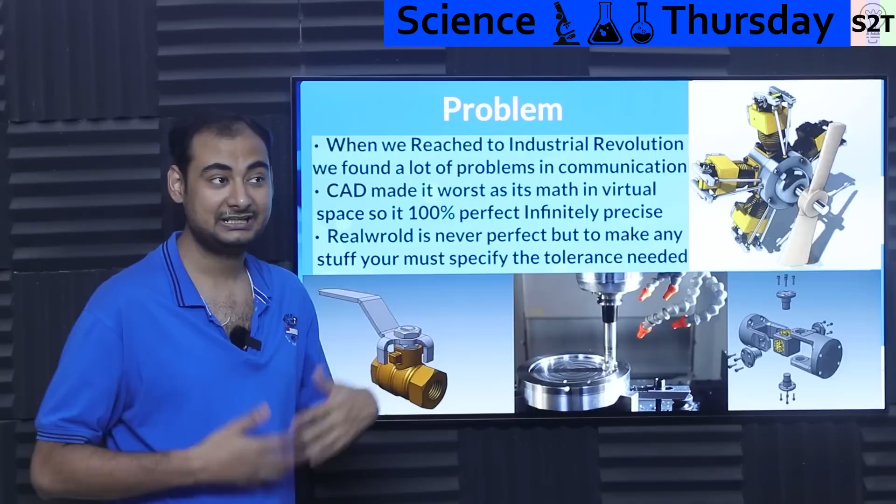So what exactly is the problem? Well, the problem did not start until we reached the industrial revolution, because before that everything was very in-house. A company used to make things, but everything was in one place - the person designing it, the person machining it, or sometimes it could be one person doing it very slowly. So there was no issue of communication.

But once we reached the industrial revolution, we started to create an ecosystem where you'd say, hey bro, I want this axle to fit for this - you're supposed to be able to tell someone else. And then we realized communication is a hell of a beast.

The problem is, what do you mean by 10 millimeters? I'm like, wait, doesn't 10 millimeters say 10 millimeters? Well, in a perfect infinite world, yeah, it will be 10 millimeter. Real world is not like that. Real world is not perfect.

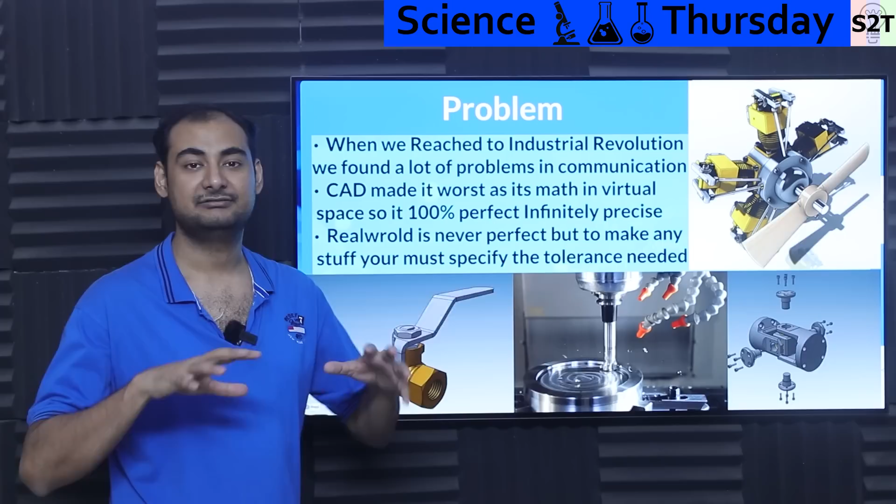And CAD made it worse. That's a recent thing - CAD is a mathematical world inside a virtual world. So once you go there, it's like, you want 10 millimeter? It is 10 millimeter. It's like, bro, 10 millimeter does not exist. If you look into the mathematics going into the virtual world that's making these things, it's perfect. Zoom in, 10 millimeter is 10.000000. There is no plus and minus. It will go to infinity, it's perfect.

Now, the real world is not perfect, meaning 10 millimeter means 10 millimeter plus or minus a certain extent. So it could be 9.91, it could be 10.01 - there would be some tolerance. Or if it's a really good part, it could be 10.001, or it could be 9.991. So there will always be a flex to it, there is always a give to it, a tolerance to it.

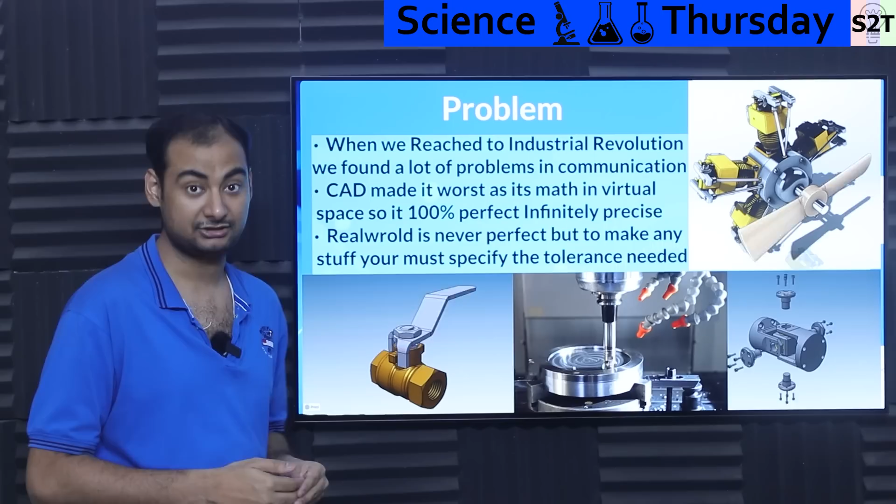And that created the communication issue. Basically, the moment we say, hey, get this part manufactured there and we're going to assemble it, get this part there to improve your production output, and then you got all the parts - none of them fit with each other because they are not communicating properly.

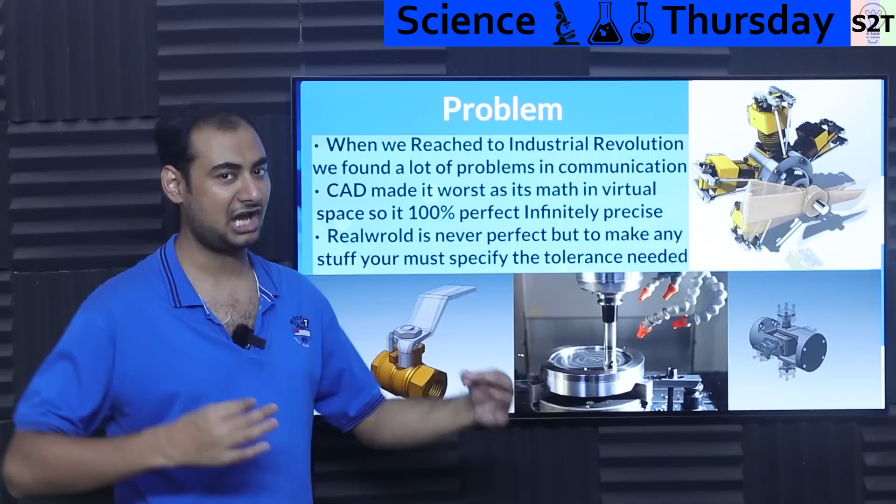Meaning the 10 millimeter of one is very precise, absolute - 10 millimeter, who cares about that 0.000, that plus and minus - that's the hassle. So that creates an issue. We do not live in a world where we have 100% perfect infinite precision. So that creates an issue.

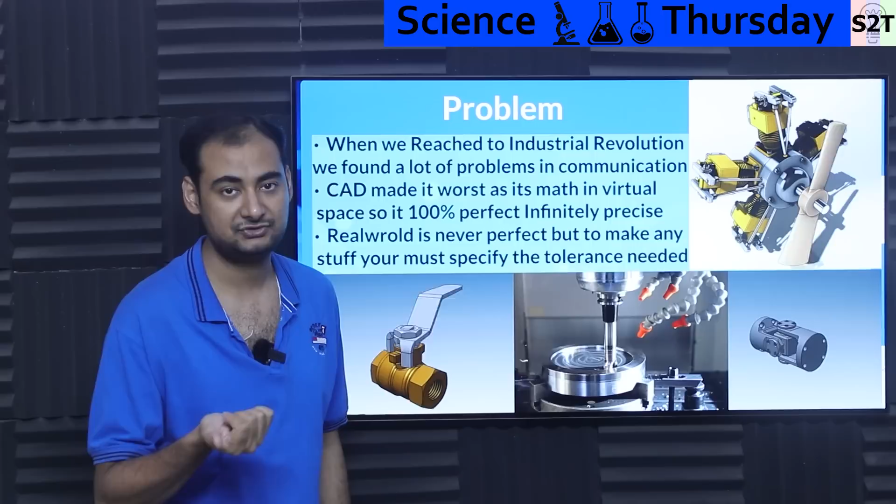And you must specify basically how the CNC machine works. It has a lot of what you'd call flex in how it works. Basically, if you want a rough and dirty part, boom boom, take and go. But if you want a really precise part, then you're going to do a lot of tool changing, you're going to optimize your tool path - all of those things have to be done. How the heck do you communicate that? So that is the problem.

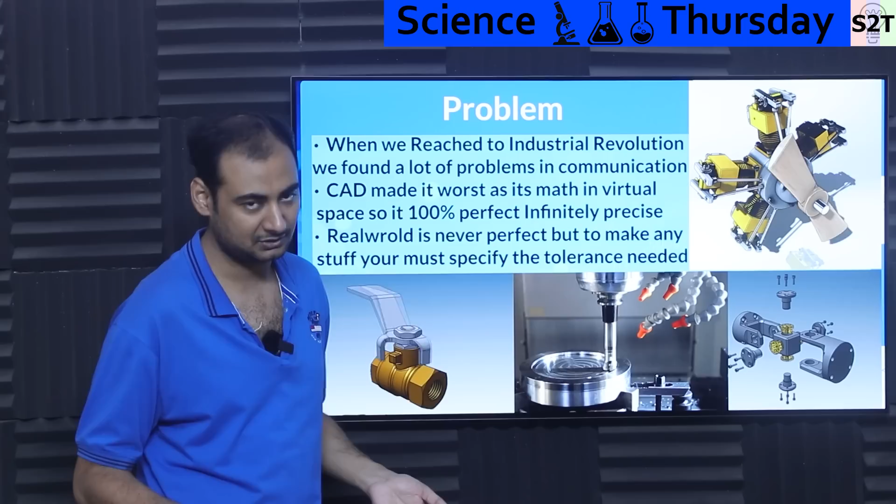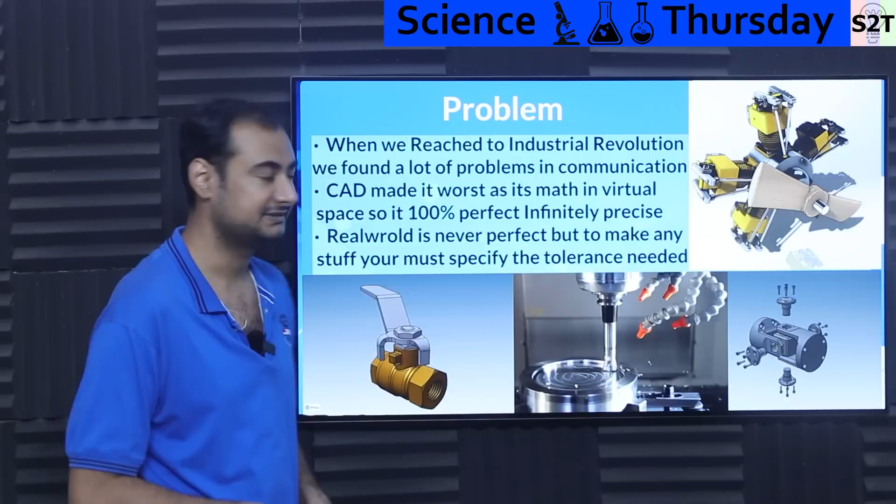The communication breaks down. The moment we want to make this, as long as everything is in-house, you do not even notice this is a problem. The moment you say, okay, let's say this country is going into tariffs, we're going to take the factories out and put it somewhere else - you would be shocked. The things that were working no longer work simply because it's not fitting together. So there is a genuine problem that we must take care of.

So the first iteration, Mach 1 iteration of this technology was tolerancing. Basically, machines can never have infinite precision. You may be like, okay, but we can make 10 millimeter - yes, 10.0, we got this. But what about 10.001? Okay, well, expensive CNC, but again, we got this. What about 0.0001?

Now you are going into EDM territory, and not to mention expensive EDM territory. Normal EDMs can't even do that - not because the technology can't do that, it's that their motion systems have to be that refined and that precise. So that creates a scenario - we cannot achieve infinite precision.

They are not very tight, so to say. So we always have to specify need and some tolerance, and you need to have it, because worst case scenario is you do make it exactly like 10, and somebody made it 10. Then either it will not fit, or worst case, it will fit and then jam, and it will be useless. So you're like, okay, I'm going to fit this perfect bearing, and it's like, it's not gonna work. So it will jam up.

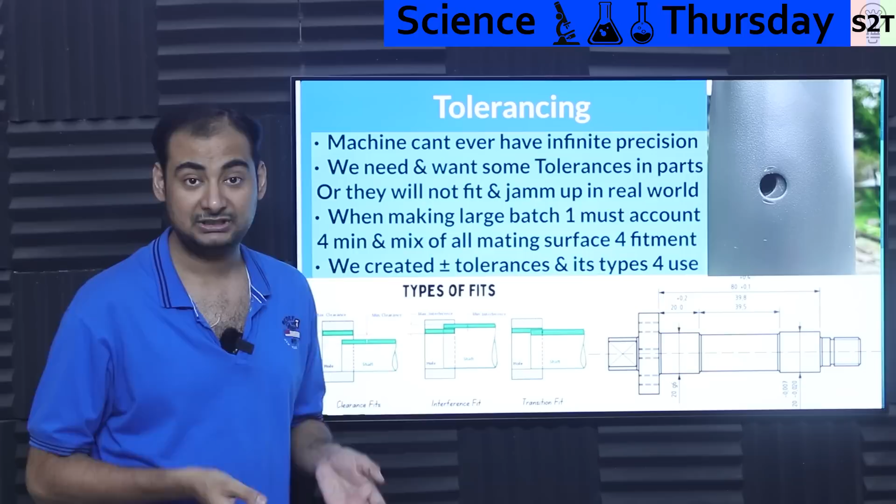So we have learned it the hard way that you must give something. And be mindful, if you are doing it properly, you will also account for temperature. For example, this aluminum part goes into the steel part. What is the thermal expansion of steel versus the expansion of aluminum? You have to figure things out. It's one of those things that you must account for.

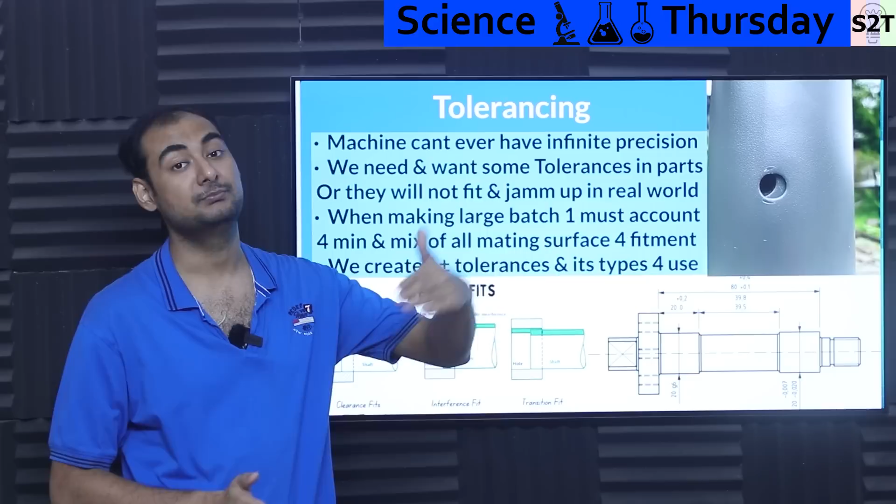When you're making a large batch, it's one thing. Let's say a designer made something, an engineer working on it manually, physically going and double checking everything. He could use his own intuition to fine tune it and make it a fitment. But the moment you go batch processing, this sort of up and down is not allowed, where it's like, no, one person methodically building it - that is no longer possible.

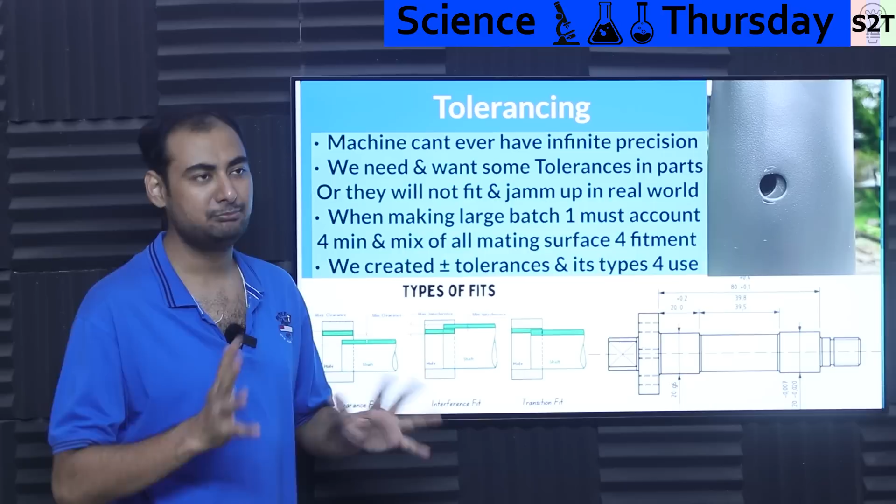So what do we do? We do min-max. Basically, what is the minimum, what is the maximum allowed, so it can work for the intended application. For example, you can have a clearance fit, you can have an interference fit, and then you can have a transition fit. You have to specify what you need. Do you need this pin to be a locating pin? Then you focus on interference fit, because once you put it, you do not want it to move. But do you want it to be like a bolt, and you are using spring tension to lock it down? Then you're going to focus on clearance fit. Or sometimes you just want it to be rotated once in a while, so it's transition fit. Again, you have to figure it out based on your application and the material property.

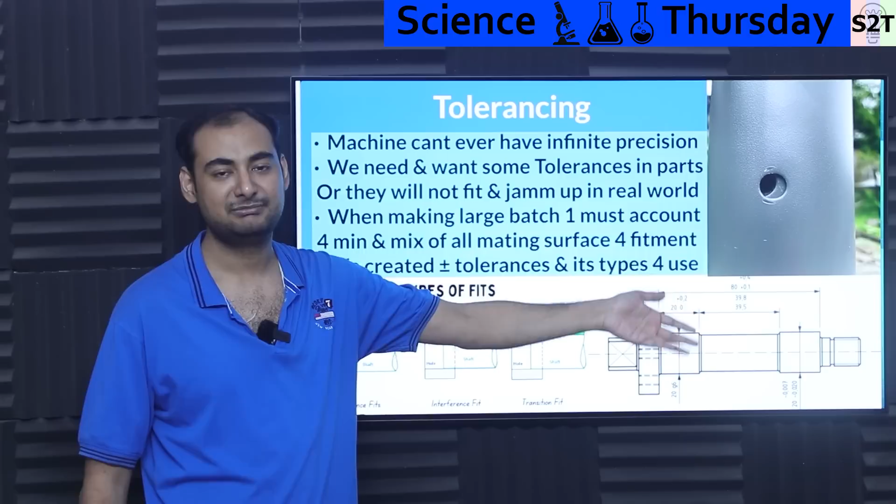This has to be taken into consideration. If you do not, this will happen - things will not fit up properly. So we define min-max, and the easiest way to spot min-max is there will be two dimensions. For example, you have one dimension that says 39.5 and another says 39.8. What the hell? That simply means make sure it does not go below 39.5 or above 39.8. They are giving you a range. And sometimes it will just be like 20 - it's like, okay, does 20 mean exactly 20? No, 20 means 20 plus and minus 0. So it's up to you.

So that's how we started to approach it, basically from the 1950s to 70s. This is how we created the tolerancing world, where we're like, okay, you want your part, I got this, I'm cool, but please define tolerance - basically how tight it has to be, how loose.

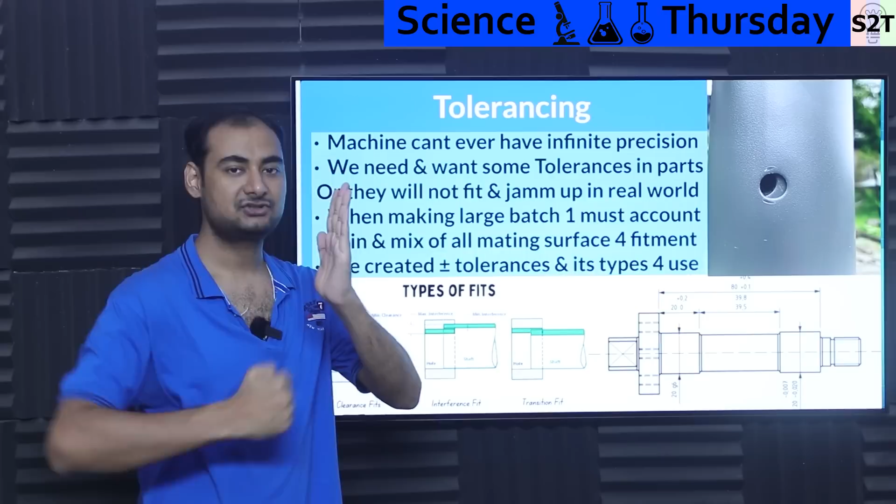Basically, a piston - it has to be, it cannot be a transition fit, nor can it be an interference fit. It has to be a clearance fit. Now here's the deal: how tight of a clearance you want, because if you have too much clearance, the piston ring will be exposed to too much pressure, and you're not converting a lot of motion. But if it's too tight, any sort of minor deviation, temperature expansion and contraction causes issue. So you have to work around it. You have to design according to it.

So tolerancing is our language where we can communicate this thing. Well, we did make a language, but it created a problem of language interpretation - basically ambiguity, meaning tolerance is not repeatable or verifiable. Like, wait, didn't we specify? Yeah, that's the whole point. How the heck do you measure it? We never thought of that.

I'm not even joking - this was an upgrade from, okay, how somebody is working in-house, to like, okay, let's make an engineering design so new recruits can work with it. But this created an issue - unless the new recruit was taught by the old ones, they will be like, what the hell is going on? They had to waste a lot of parts to relay, oh, that's what they meant. So there was a lot of ambiguity because it was not repeatable nor verifiable. It's like, what do you mean? I'll explain further.

So take the same sketch made with the old language of tolerancing. People did make things with it, but the moment you take that same blueprint and give it to other people, the outcome would be different. Parts won't fit. Say an engine has 8 design diagrams and 8 assemblies - give those 8 assemblies to 8 different manufacturers, and nothing will fit, because the diagram is too sloppy. It has too much room for interpretation.

So size and position are defined - that's cool, awesome. But there's no data for what you mean by the form, what you mean by location, what the tolerance is on those things. You have to already know what you're looking at. That's the problem with this. And so how do we solve it?

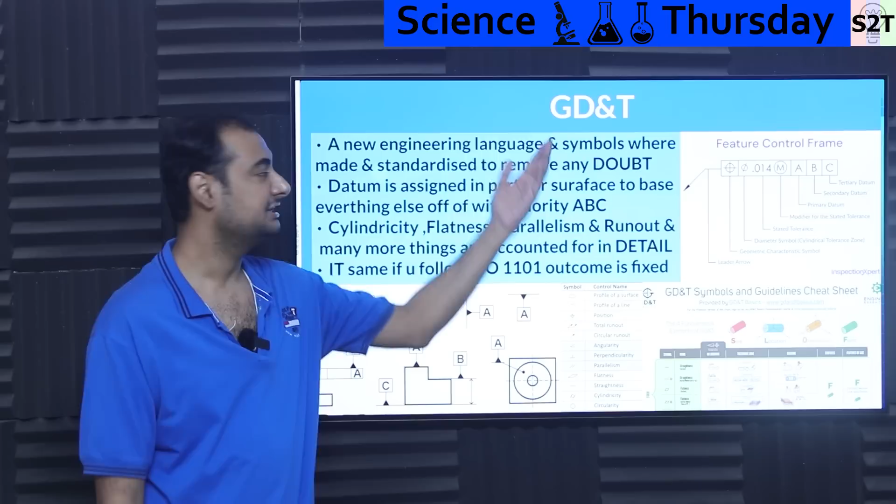So this was the big hurdle in the 70s. Then we invented GD&T - basically a new engineering language. The idea is we create a symbol, create an index of those symbols, create a standard, and remove all doubt. Meaning if you use GD&T, in the end there is no discussion - this mechanical part will fit that mechanical part, the end. You remove every single bit of ambiguity.

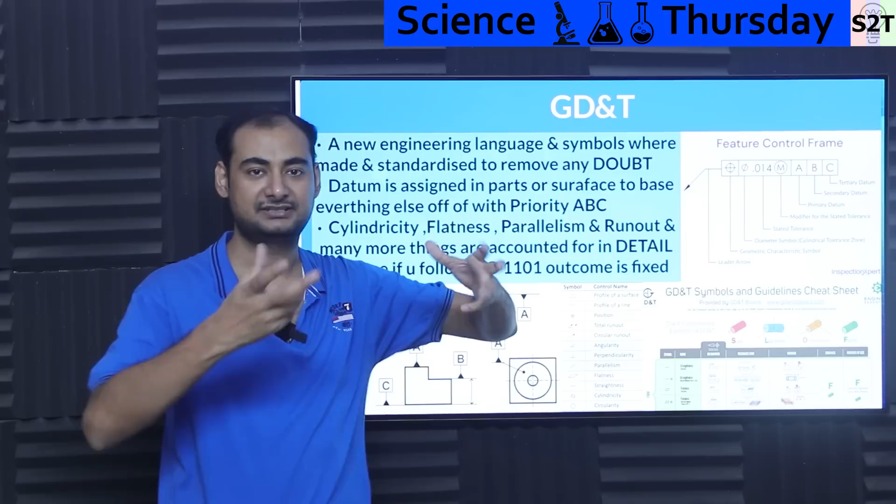That's why you'll find something weird - there is no dimension in that, like what is the diameter? They're not even specifying that, because that can come from normal general design, like oh it's 10 millimeters. Okay, but you don't want just that - you know it's 10 millimeters, but here's the 10 millimeter plus 0.014, that's the tolerance allowed. And then you can have a modifier there.

Do you need that? There are certain modifier categories - you can specify, for my application I would like this sort of modifier if I need it. Mostly you won't, but if you need it, you can have it. And then you're going to have a primary datum - and this is where things changed.

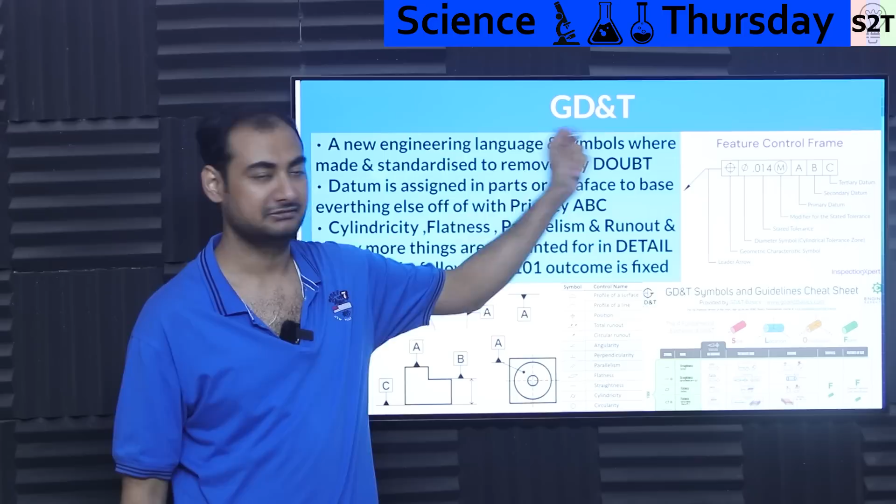Basically, datum allows this, this is your primary, make sure this part is right. For example, let's say you're making engine blocks. How do you know which is the most important part? Well, we are working on it, so we are learning the hard way.

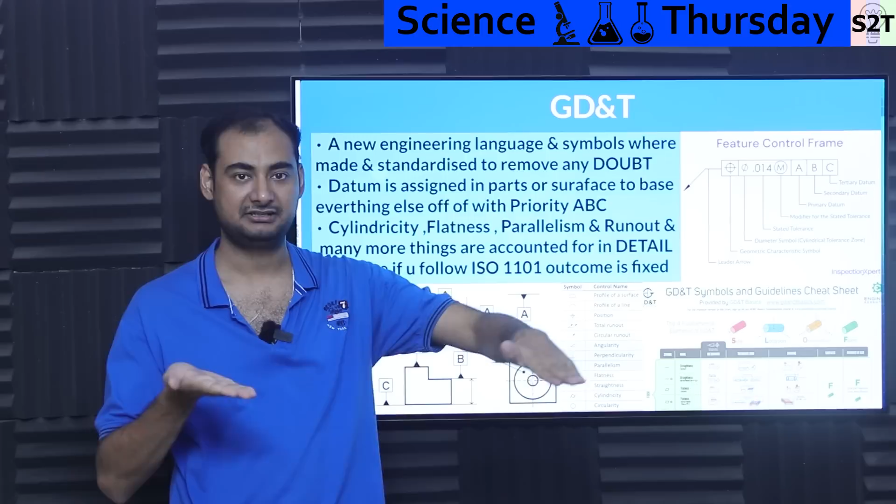When you are making engines, you make sure that gasket block is very flat. That's flat AF, but again, it's a casted thing. So we make sure everything else is relative to that flat surface. That puppy has to be flat. Then we make sure the cylinder head is also flat, and then these two puppies make love together properly. So that's how we'll design in GD&T.

We will say A, this is your primary, and then we're going to say B on the side and C on the bottom. If there is an oil pan, we're going to put B or C on the oil pan. Again, if you have a lot of stuff bolting on the front side, that will become B, and if you have some stuff going into the bottom, C.

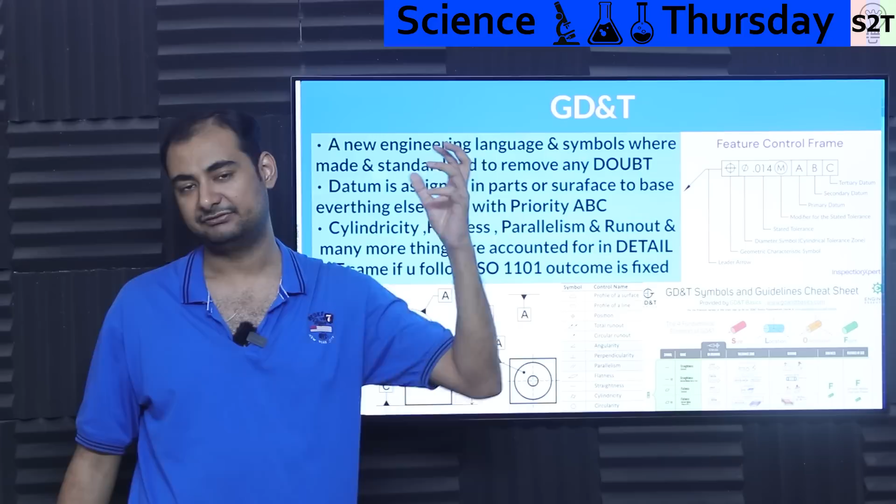So they are also done priority wise, meaning A is generally supposed to focus on the highest priority and also measurement point. So you measure from A, then you double check from B, then you triple check from C. So A, B, C, that's why they have that.

And if you are a good user of GD&T, it will always be in serial order A, B, C. You will not have a B, A, C. You can do that, technically it is allowed, but it's a very bad design. Because if you do that, somebody will make that mistake. So datums allow us to figure out which surface is important.

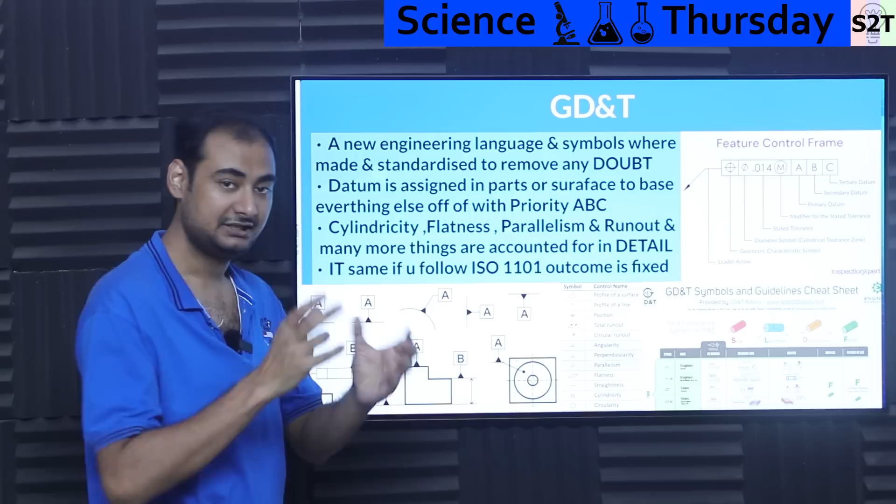You must have seen people on YouTube where they have a surface plate, they polish it and then put things and measure it. Which surface are you supposed to use? Datum takes care of that part. It's like, use A datum. And again, it has a hole, basically data taken care of.

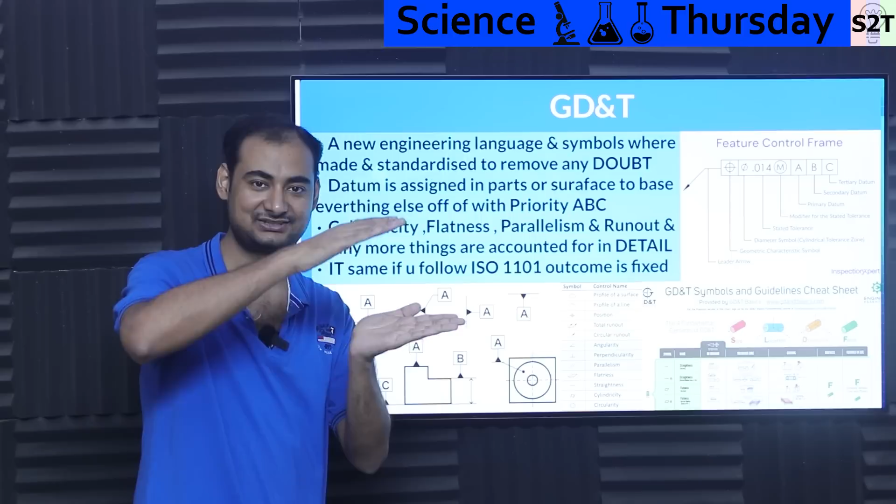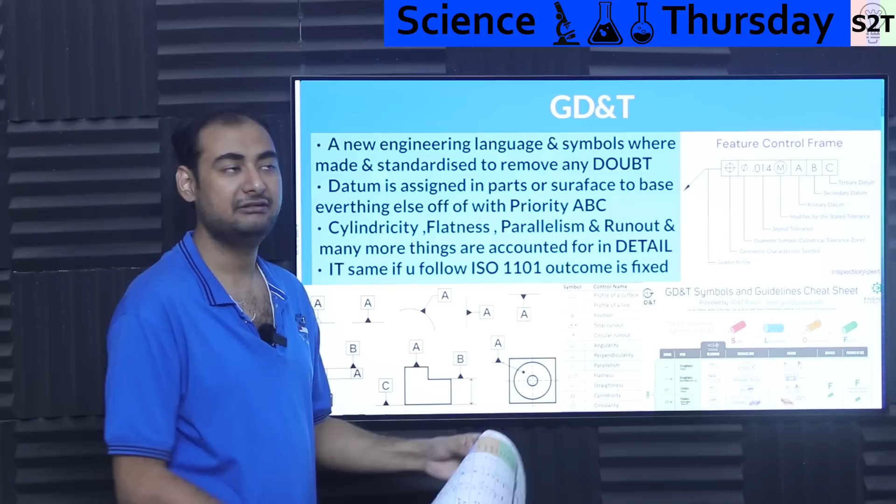Make sure it's parallel to this? No, we will not do that. We'll just give the symbol, and then we'll say make sure A is parallel to B. Done, go home, sweet dreams. So that's the whole point. This is a whole language we have built, this system, and it can define everything within reason to every industry. Meaning I'm working with aerospace, you're going to use the same thing.

I'm working with a large industrial foundry machine, it's the exact same language. This language is universal, meaning if somebody made this correctly and somebody is interpreting this correctly, meaning they are trained in GD&T, your part should match. Meaning there is no, oh I'm building this in Mexico and I'm taking the part to assemble in India, no problem. It should fit. If both of them are following GD&T properly and there is no mistake in the GD&T, the datum will match and both parts will make love properly.

So you can literally say, hey, I have oil pans being manufactured in Nepal for some reason, I'm gonna have piston heads manufactured somewhere else, let's say Mexico, and then I'm gonna have a cylinder block manufactured in Bangalore, and then we're gonna have them live together.

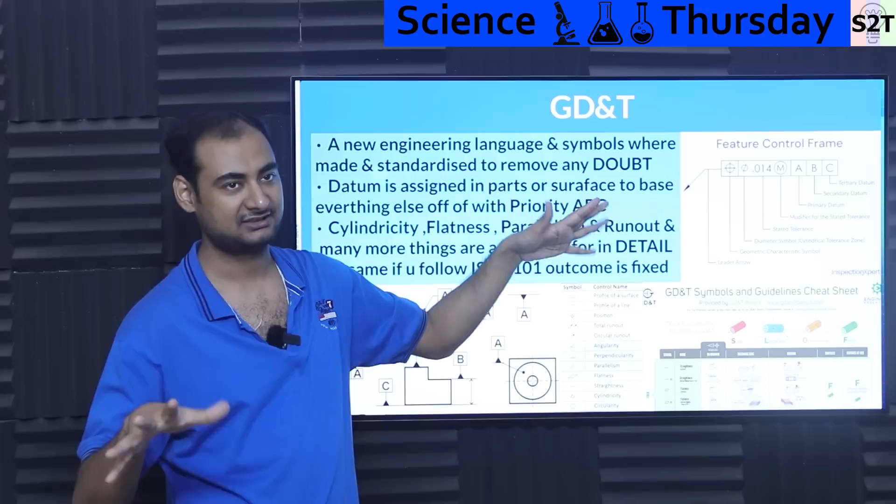That's the whole point, so you have to prioritize. Again, this is why it matters A, B, C, and it always has to be A, B, C. You can mix it up, but generally it's not recommended, it's classified as sloppy design. So you follow this properly. Anybody who's making it properly, it works. There's a whole language there, let that be very clear.

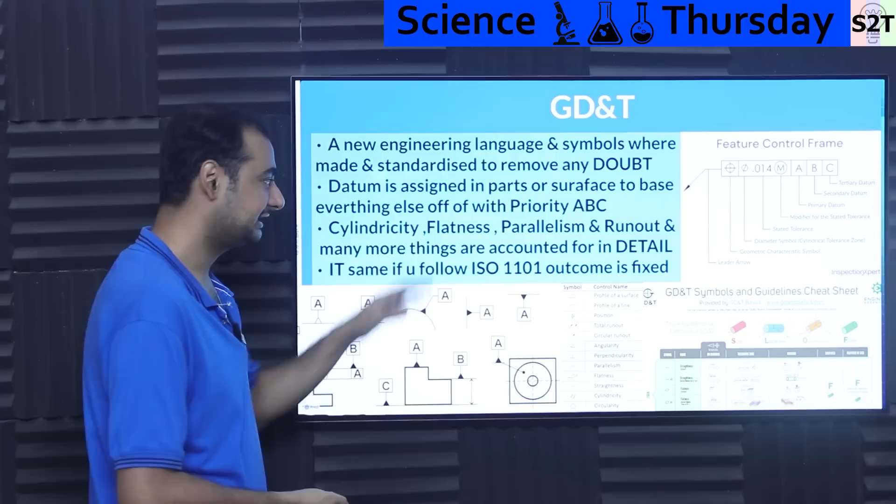You have to practice the hell out of it, because I'm not even touching modifiers yet. Datums took a lot of time. Trust me, when you look into modifiers, it's like, wait, what do you mean I have to measure from 2 points? If I cannot measure from 2 points, then it cannot apply. Yeah, because everything about GD&T is designed such a way that it can be tested.

Meaning, does this part meet the expectation? How do you know? Well, this language tells you how you're supposed to measure it also. So that's why everything is accounted for, everything is in detail, and there are standards. Because I'm working in metric system, the standard for us is ISO 1101. So this standard, if your machine shop and your engineer are working with this standard, everything will be fine. You do not have to worry about it.

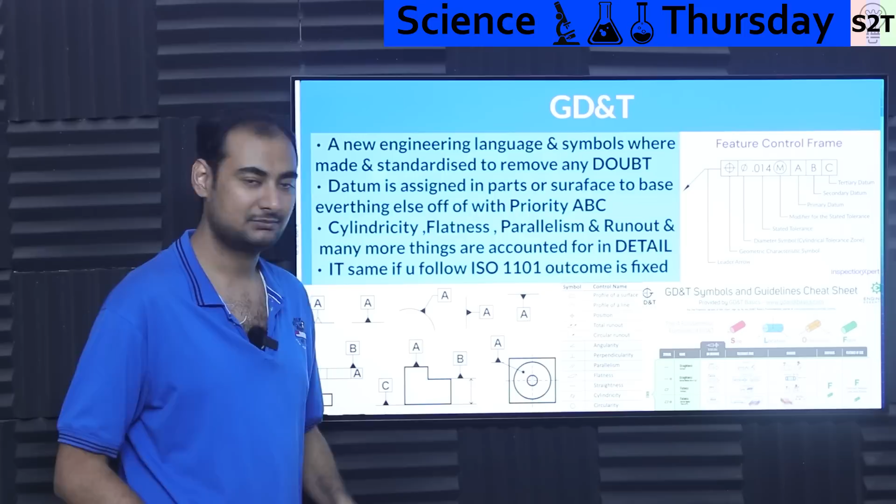You go to a Chinese shop, it's like, bro, I have this standard GD&T. They're like, I got you, fam. Your part will work, you do not have to worry about it. It will work. So that's why GD&T language was created. Basically, it removed ambiguity. That's why symbols are used, meaning every symbol is same.

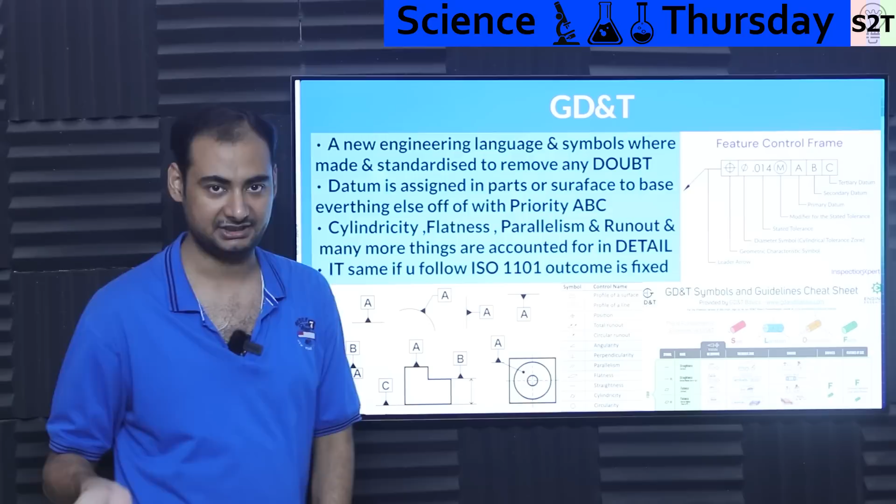Now, are there a difference between American standard and ISO standard? A little bit, but trust me, going from A to B is possible. Although it's not recommended to do so, because this thing is designed as an absolute transition error-free thing. So you may have to re-dimension it, but it can be done. So GD&T removes oops from our machine world.

So how do we utilize it? Well, it's a language. So whenever you are dealing with CAD, it needs certain level of trust, because when you are designing in computer, you can design, oh, this is a 10 millimeter part. Can you trust that 10 millimeter will fit inside a 10 millimeter hole? How do you design it? You go to tolerance. Tolerance is still sloppy, so you have to go to GD&T.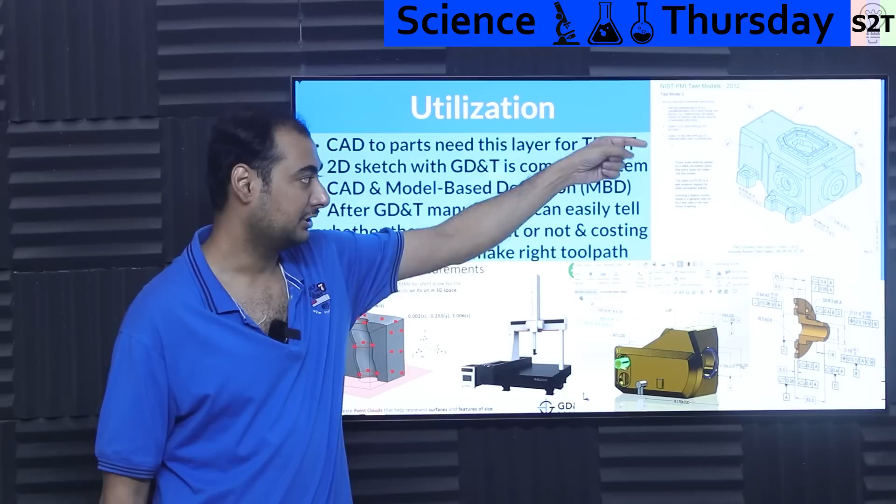So how do we do that? Well, first, this old system from way back till now is still in use: you create a 2D drawing of it, and then you put GD&T data in that drawing. So you'll specify that surface is this, datum is A, B, and C, and point from here to there, measure it. This is plus and minus. You will do that. That's on the 2D layer.

Basically, you take a 3D model, slice it into 2D diagrams, and do this. This is generally still preferred in a lot of places, and it is desirable if you are not doing everything in-house. So 2D sketch with GD&T is a very common system.

And then you have one step above, that is CAD models. So engineering companies, basically like Fusion, Adobe and Autodesk, yeah, Autodesk, and another one is SolidWorks. They realized that this was an issue, so they created MBD, model-based definition. Meaning the idea is now all that GD&T data, because it's a standardized ISO standard, they're gonna put that language into the model itself.

So you have a model, and in that model you have an extra layer, that is model-based definition. In that layer you specify, hey, this hole has to have this sort of plus and minus. And again, because it's in 3D, you can rotate and look at it. So 2D sketch many times confuses people. It's like, if you're used to 2D, 3D will confuse you, and if you're used to 3D, 2D will confuse you.

So people are like, hey, because we are designing in 3D, CNC machine is working in 3D, why not have the dimensioning in 3D? So this was created, MBD. This was like, I think, 10 years ago.

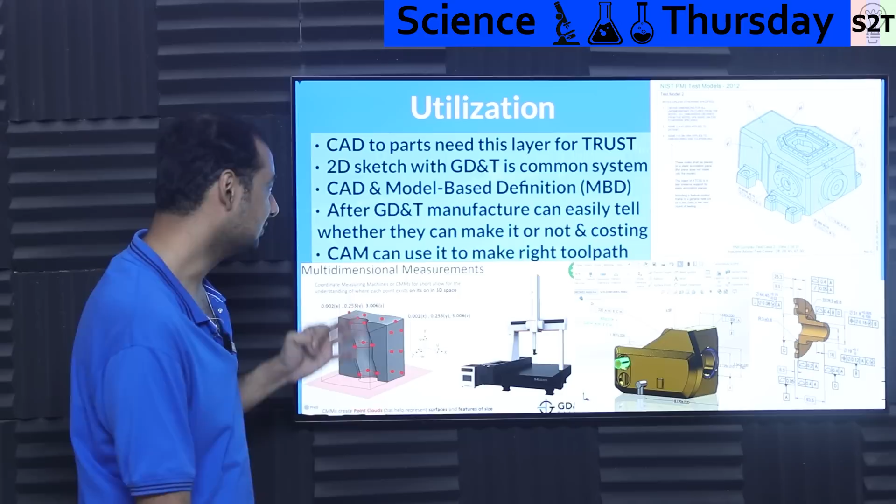So MBD is just a container. In that container, you can have sloppy things like tolerance, or precise things like GD&T. So it's a container, you put whatever you want into it. And once you have done that, if the pipeline is correct, you should be able to get your manufacturing part done correctly. And most importantly, whether it can be made or not.

For example, you can be like, okay, I want 0.000 — so far we are talking 0. Yeah, no, that extra 0 is like, no, at that point it requires precision temperature control, meaning 25 degrees Celsius is not precise enough, it has to be 25.000. And not to mention, everything has to be done in one area, because different materials have different expansion.

Once you start to add too many zeros, it's like, it can be done, it's just going to cost a million dollars, so to say. So can the machine shop make it? They will read into GD&T and they're like, yeah, I got you, or they're saying, no sir, this sort of precision we do not deal with. Again, not every part needs it. This is another aspect of engineering. You can design a part that is perfectly perfect, it's just that you're not supposed to. You only design to bare minimum, so it costs the least amount of money and it still works. That's the whole point. The manufacturing can be done easily, not to mention how much it's going to cost.

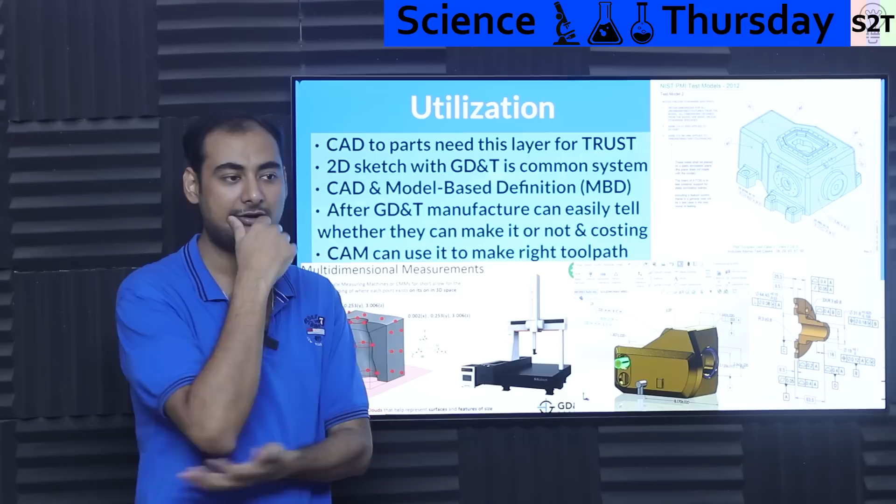Now we have an extra layer, because we're switching from manually doing the machine to CAM, computer aided manufacturing. People who build the software realized, hey, what if both CAD and CAM are in one package? Fusion 360, SolidWorks, Siemens NX, all of them have both packages. The benefit is they can read the data, meaning they can read model-based definition. If you have a hole that's supposed to be a tolerance fit, your CAM machine will know this guy wants this hole to be very precise, not a loose fit. So it'll make a roughing pass, then a polishing pass, then it'll do 2-3 passes until it reaches the exact requirement, or as best as the machine can do. That documentation only happens between CAM and CAD, because you have the MBD layer. The output should be, if done correctly, after 1 or 2 test pieces, what you define properly in CAD, the part should just take it and go. If done correctly, it is that good - take it and go, take it and go. So it can be done that way.

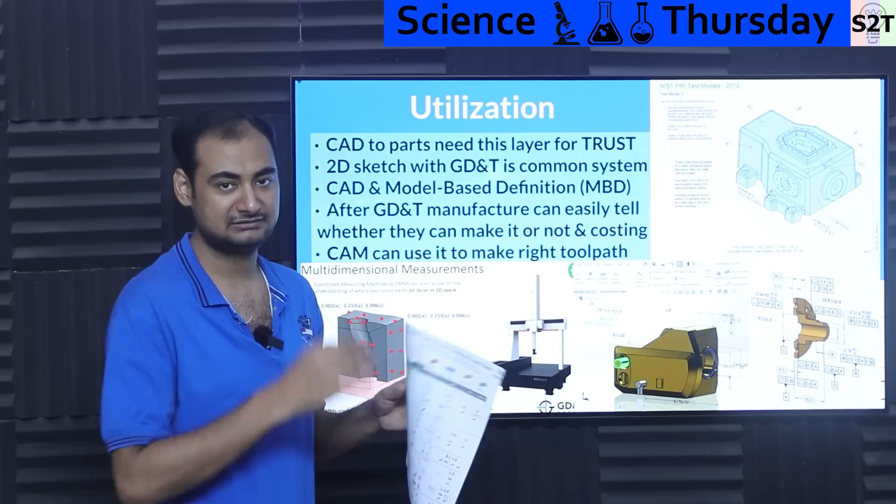And there's another reason for that. If you have this data in your CAD, it can go into a computer coordinate measurement system and automate the process. Otherwise, you have to take the mesh, point it, and then measure it, or worst case, manually measure it. The GD&T is designed for manual measurement, it can do all the manual measurement, but it was also designed so that a coordinate measurement machine can take care of it. They made sure it's universally consistent. So it doesn't matter if you're doing it in Mexico, Nepal, India, Bhutan, whatever have you, it should be compatible with everything. That's the utilization of it - if GD&T is done correctly, you should not have issues.

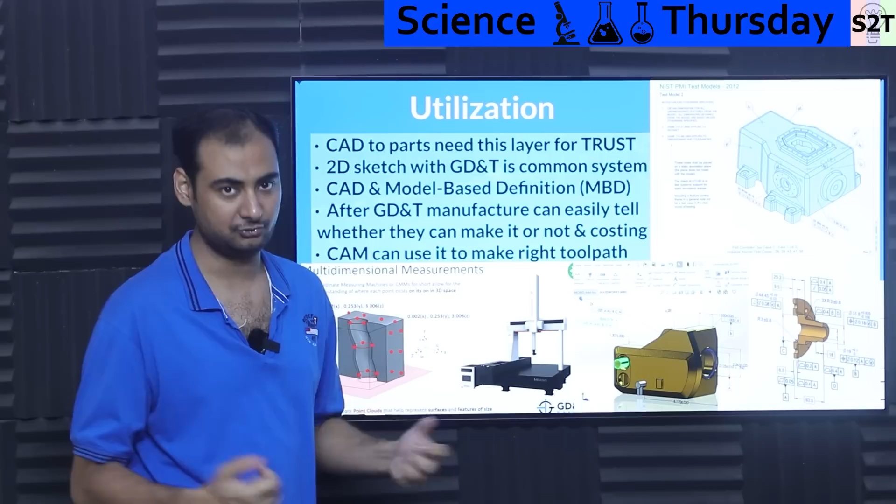If you know this GD&T was done correctly by an expert, and we send it to 3 factories, 2 factories got it right, that means the 3rd factory is not following GD&T. It's not on you, it's on them. That's why people want to use GD&T - it removes ambiguity, it's a good tool. If you're serious about manufacturing, you sooner or later have to learn to use this.

So this was my presentation on this precise world of GD&T. Hopefully you have liked it, learned from it.